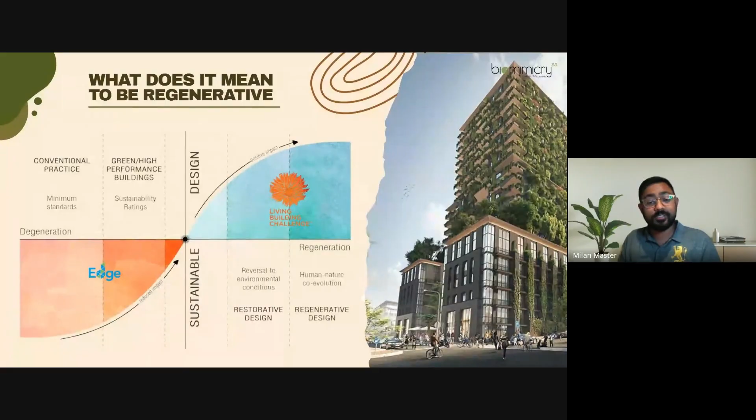But just this year, the company has been bought over and the designs are changing. And so I also want you to think, are we actually ready to move towards regeneration? Or, is the market ready? That is what they said when, unfortunately, this building is not going to come up anymore. But just think about that, are we truly ready for regeneration? Some would argue that we are, and that's where the Living Building Challenge comes into play. So what is the Living Building Challenge, and what does good really look like if we need to move away from less bad towards more good?

Well, the Living Building Challenge is a philosophy, an advocacy tool, a certification program that defines today's most advanced measure of sustainability and regeneration in the built environment. When Jason McLennan first developed the standard, he said, well, what if buildings behaved like a flower? What would that look like? What would this building in its ecosystem do with the water, waste, energy, and beauty of it all? The Living Building Challenge is done through the International Living Future Institute, and according to their website, living buildings are regenerative buildings that connect occupants to air, food, nature, light, and community.

They are self-sufficient and remain within the resources of their site. They create a positive impact on humans and natural systems that interact with them, similar to how a flower would. But what does that truly mean?

Well, the Living Building Challenge comprises 7 performance categories known as petals, which are divided into roughly 20 imperatives in combination. And these imperatives are applied to every type of building project, no matter the size or location. All imperatives must be met in order for the project to qualify as a living building. And what might these petals be?

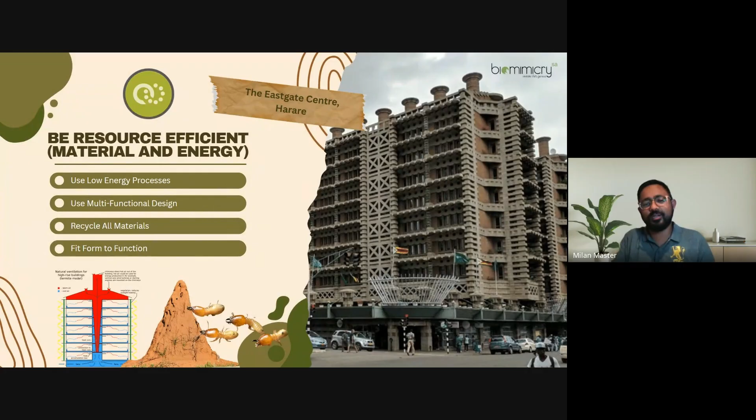We have the next principle, which is being resource efficient with materials and energy. How do we fit form to function? I think it's very easy to say, yes, we're going to fit form to function, but does that form actually produce the function that it needs to be? This is a very classic example in Zimbabwe.

It's the Eastgate Center. And Mick Pearce, when designing this, looked at termite mounds and realized that airflow through these mounds requires very minimal energy because the airflow, it fit the form to function. And so he used this and designed it here. And 30 years later, this building still has very minimal air conditioning requirements just because of the function of the building.

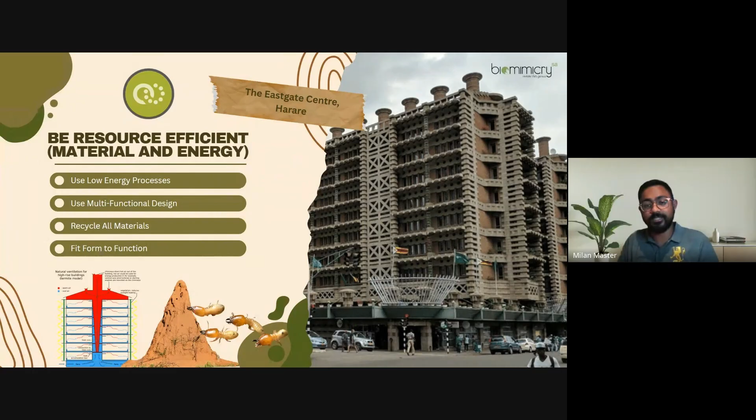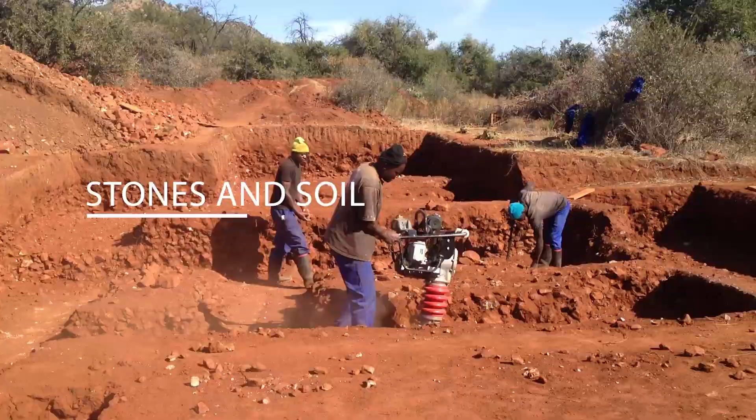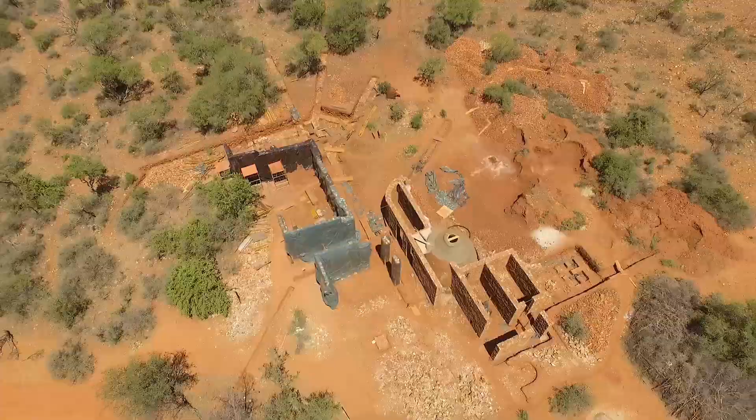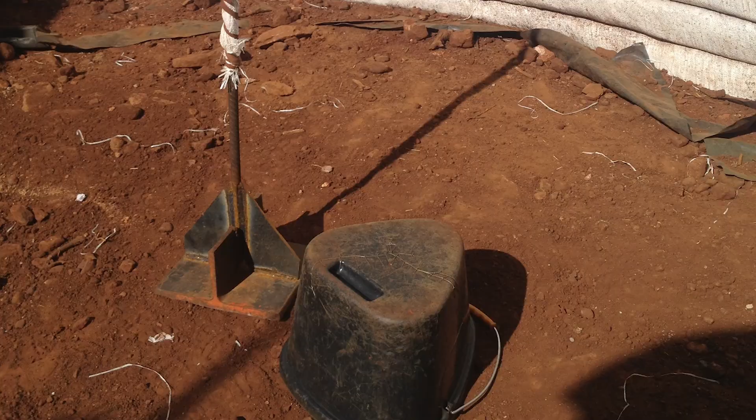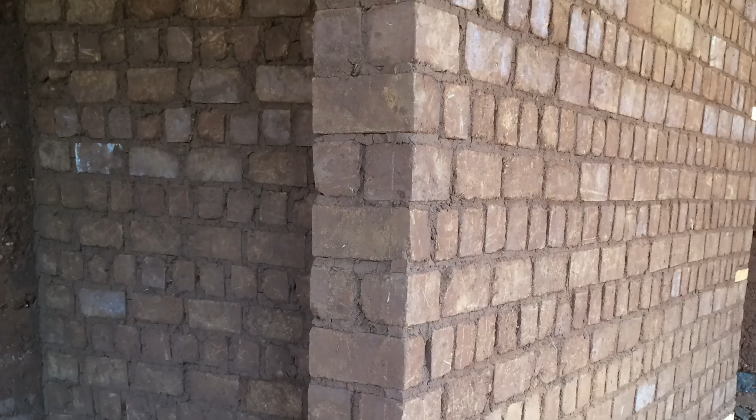Building with earth became obvious. It has been around for as long as mankind has been building. The soil that comes from the site requires no transport and no transformation. Thick earth walls take advantage of the large daily amplitude, regulating temperature in summer as much as in winter, avoiding air conditioning. By removing cement, our earth building will one day return to nature, a little like a sandcastle erased by the tide.

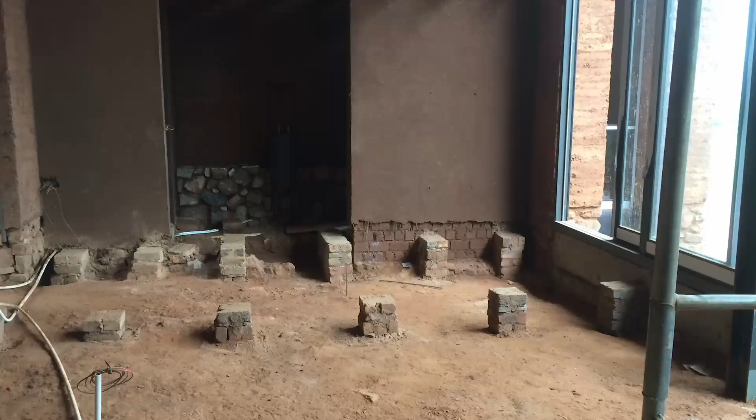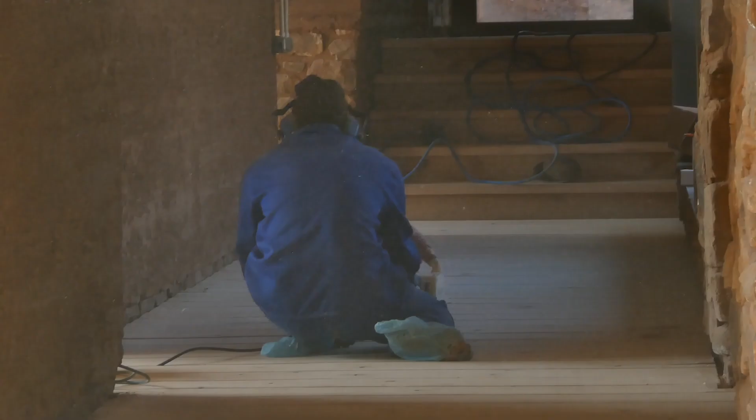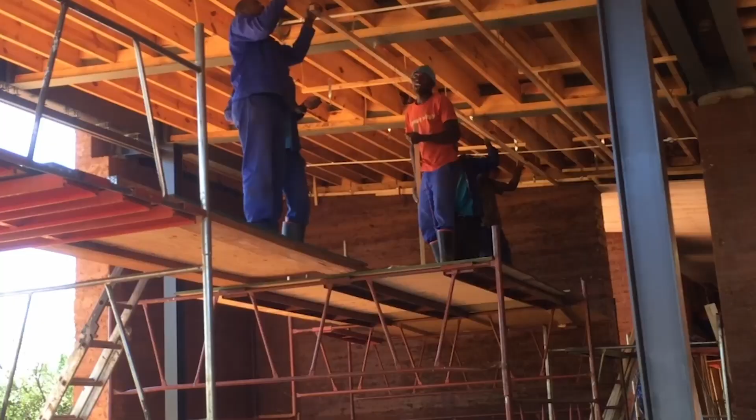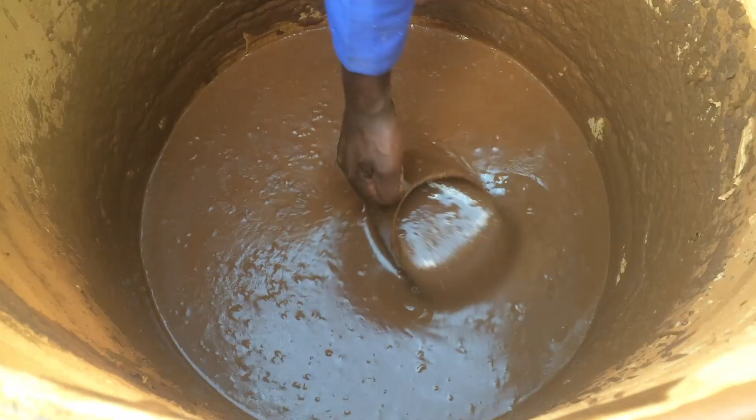Inspired by old ruins in the area and people across the world, our project became a lab for experimenting with different earth techniques, from stone and mud to rammed earth, compressed earth bricks, earth bags to straw and soil plaster. This, combined with waste granite, scaffolding planks and homemade paint to name a few, has made for a raw and rich living environment.

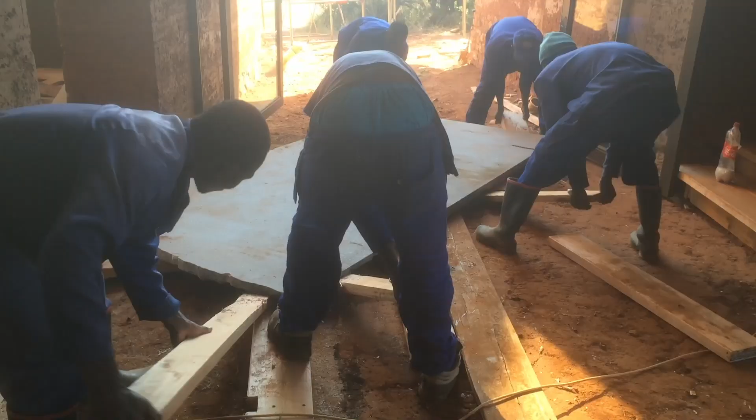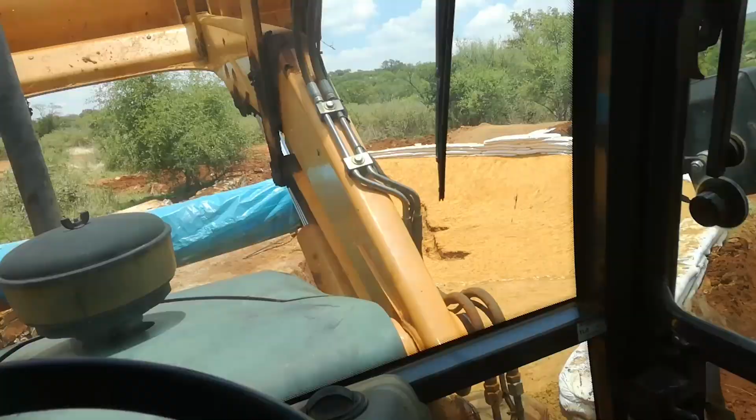Another achievement was, I believe, our decision to build the house ourselves only with the help of a few unskilled laborers, and in so doing, teaching them the building techniques we wanted to implement. This took a little longer, but had more benefits. We believe that through this project, we demonstrated that building differently is possible, closer to nature, closer to the people, enriching both. We hope this will inspire others to do the same.

Okay, so building with earth. So I'm going to try to be a little more practical. I mean, it's a very practical project that's born out of a passion. I'm more known for working in the corporate environment and large building environment, but I've always had a passion for buildings that really incorporate or work better with nature. And this opportunity presented itself, and we really dived directly into how to build with earth.

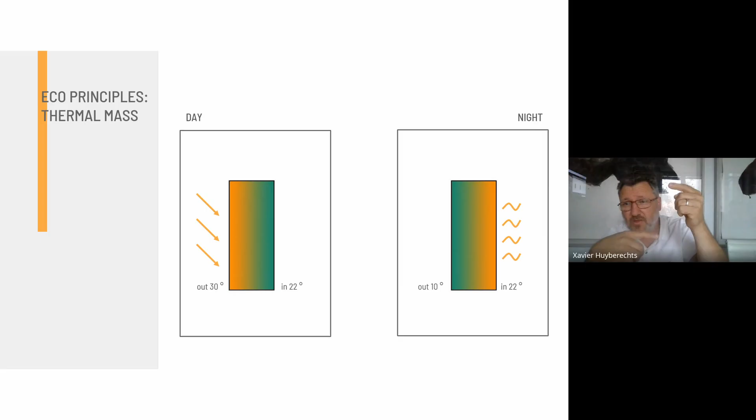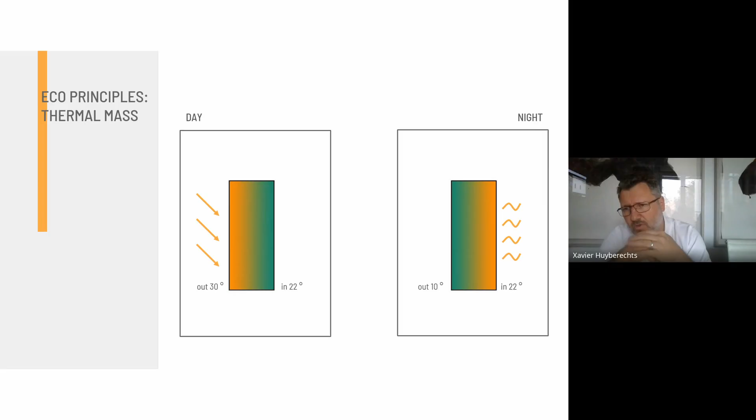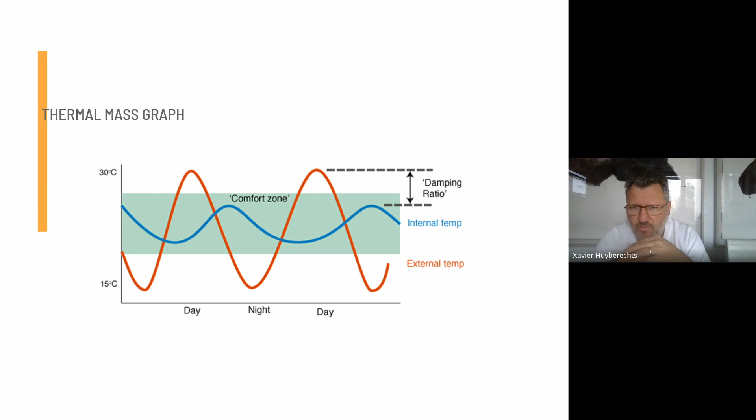On the south side, on the north side, I'll get there. I'm still in Europe today.

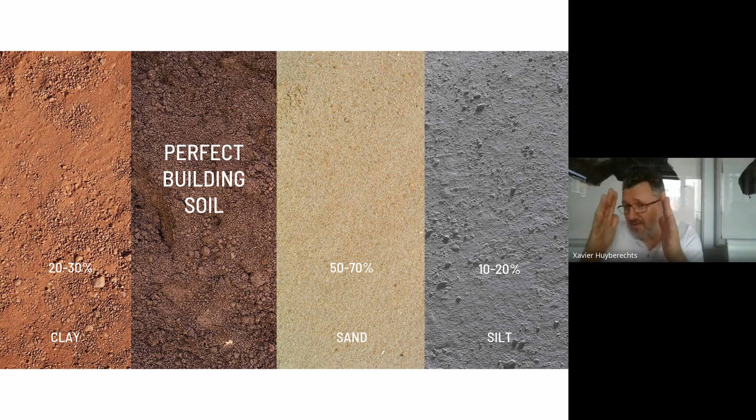So building with earth. The main thing that you need to know is that you need to have the right soil to be able to build with earth. If you've got pure sand, well, nothing holds and it just falls down all the time. We've all built sand castles along the beach and they don't stand. And even when you wet them a little bit to try to make them hold, once it dries, it goes flat. So pure sand is no good.

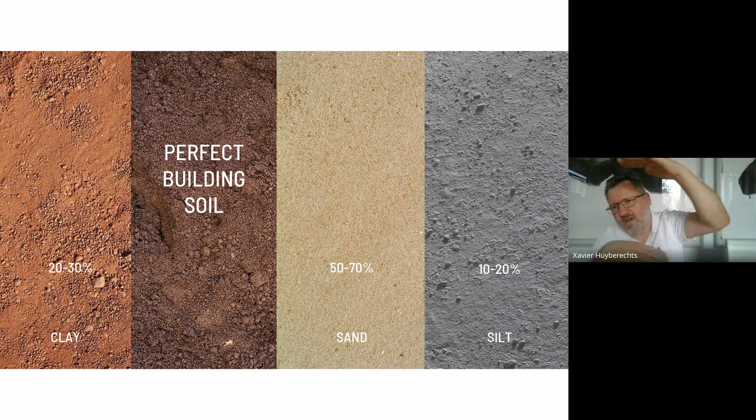Pure clay is no good either, because as architects or people in the building industry, you know that when you build on clay, when the clay gets wet, it swells, and when the clay dries, it drops and it starts cracking. So too much clay is also not good. And then there's the silt. The proportions you need to have an earth that you can build with is between 20 and 30% of clay, about 50 to 70% of sand and 10 to 20% of silt. That's really the perfect type of mix, and you can push that quite further.

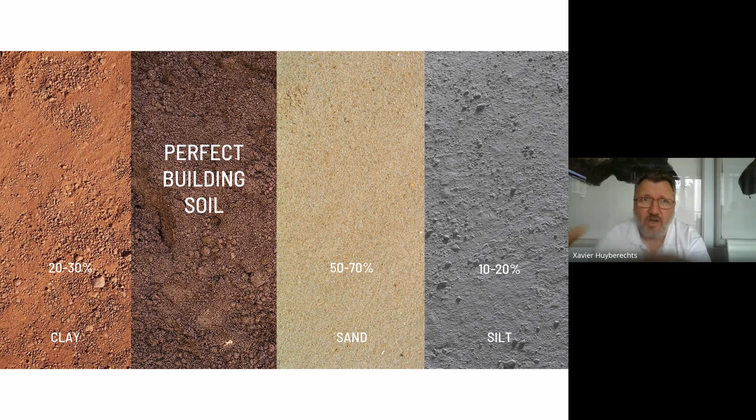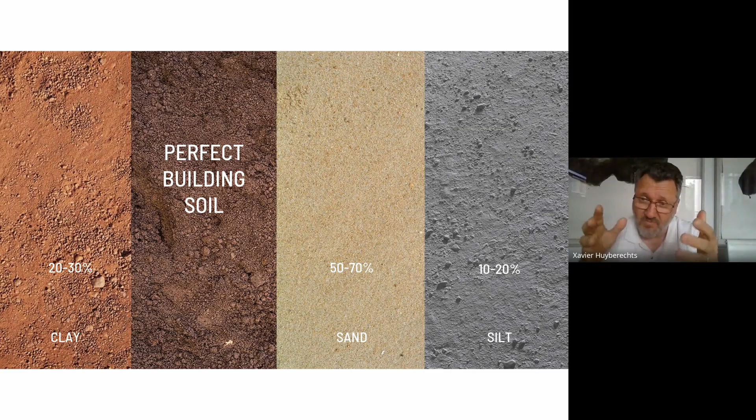Now, if you are close to a river or a riverbed, you need to pay attention that you don't have too much clay. If you are very much inland, far from everything, most probably you'll have a lot of sand. But testing is very easy. So there's about 9 hand tests that we use to test the quality of the earth. These are just 3 of them.

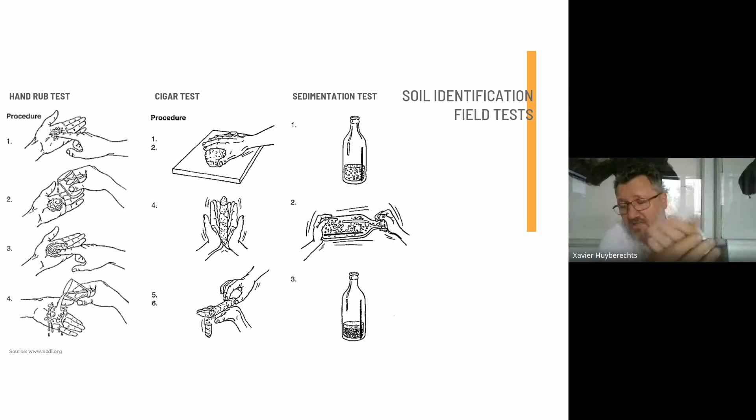The one is you put some soil into your hand and you just rub it a little bit in your hand. If you rub it and there's nothing in your hand, it means that it's pure sand. Like on the beach, there's nothing left. So that's no good. If it sticks and it's very orange and it sticks to your hand, there's too much clay. And so as you learn about building with earth, very quickly, just by grabbing a little bit of soil from the site, you will see whether your earth is correct, or whether you need to bring a little bit of sand or a little bit of clay.

Another test is the cigar test, where you moisten the earth slightly, and then you create a long cigar. You push it over your hand or over the edge of a table, and you see how long it goes. So if it goes too far and it starts bending like that without breaking, you've got too much clay. If you push it and it breaks immediately, you've got too much sand. So those are 2 quick techniques.

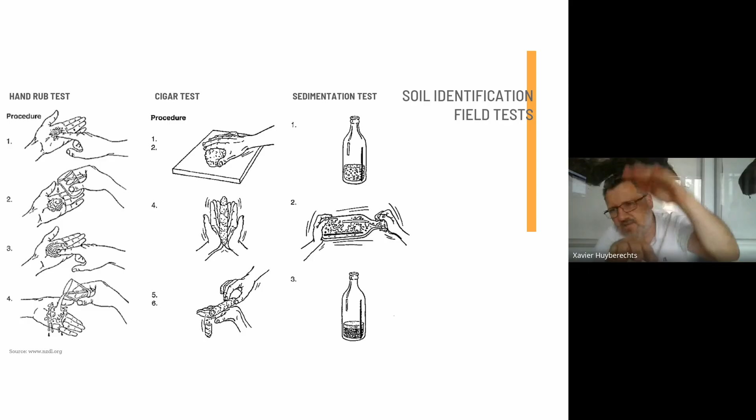And then one that is almost compulsory is really the sedimentation test, where you put earth into a bottle, 50% water, you shake it well, you leave it for 3 days, you come back and you will see that all the different elements have actually layered in your bottle, with the water at the top, and then the clay, and then the silt, and then the sand at the bottom, and little rocks and things like that. And then you can really start seeing the proportions that you have. So those are hand field tests. Some people also use lab tests to be more precise.

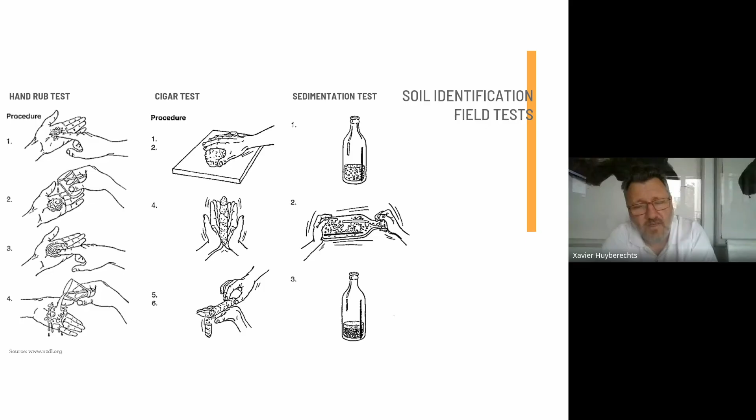And if I've got time, I'll speak a little about some of the masters in building with earth. So into the house, what we wanted to do is to really create about 4 building techniques. And of the building techniques with earth, the first one that everybody generally knows is the rammed earth walls. So if you go to the next slide, with rammed earth you use some type of shutter. You can use wood shutters like in the past, and you will see that we used wood shutters in the first house that we did, and there was a lot of movement with the wood.

So after that, we worked with steel shutters that we borrowed from one of our contracting friends, and that works even better. So you put your shutters up, you put your soil, you moisten the soil a little bit the day before, but it's just moist. It's not wet, it's not cement, it's not flowing, because you need to be able to compact it.

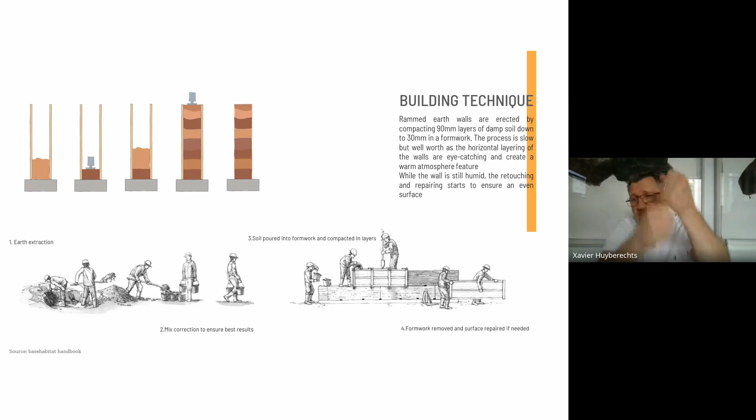And you create 90 millimeters of soil and you compact it down to 30. So you compact 2/3 down to get to the right level. You can compact by hand, and that's what we do with stampers. So we've got a big heavy plate at the bottom and then just a rod at the top, and we stamp the soil layer by layer by layer, and you go up that way.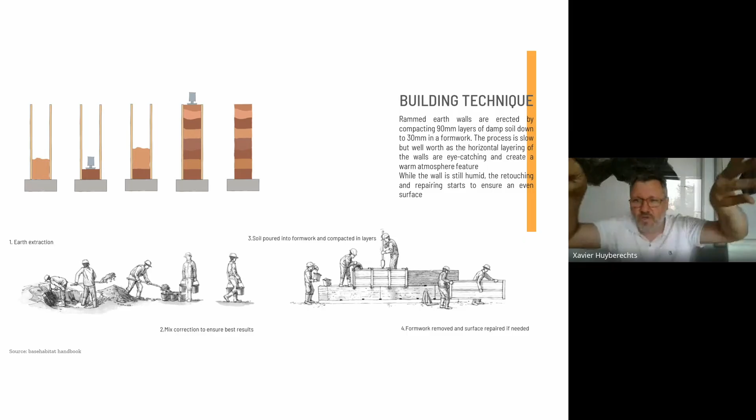In Europe, they use a lot of mechanical stampers, so like a big drilling machine that stamps, but you can't use the machine that you do the roads with. That has got too much force and it pushes all the earth away. So you can't press too hard. There is something that you need to compress the earth, but you can't go beyond, and then it starts breaking and going all over the show.

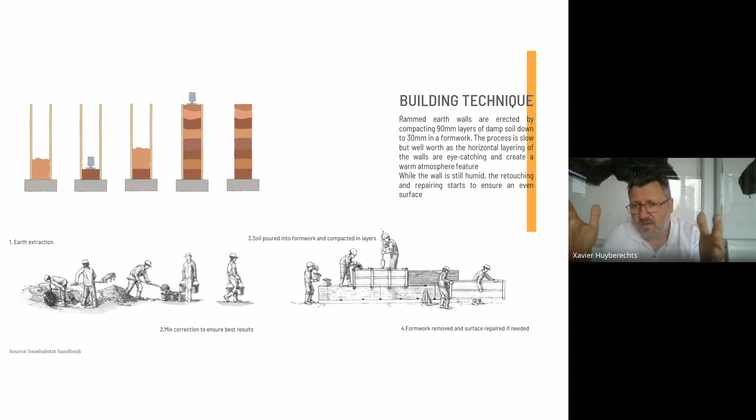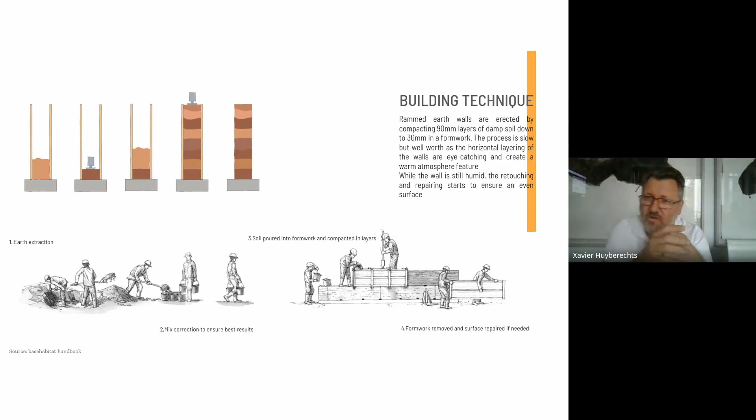So those walls are extremely strong. One of the walls in the lodge has got about 6 tons per running meter on the wall, and it's a 5 meter tall wall. It's 50 centimeters thick, and just to give you an idea, 6 tons is about 3 or 4 large SUVs per running meter of the wall. And that's because we've got a green roof. And in South Africa, our green roofs need to have a lot of soil, because otherwise nothing grows on it because it's too hot.

So here you see the walls, how we will build them with formwork. Now it's very different from concrete, where you need formwork right to the bottom. Here you can see that the formwork climbs as you do your layers. You need your verticals, but horizontally you only need one panel, and you push that panel up all the time. We have got some ferrules like in concrete, so that when you stamp it, the shutters don't split, and so you do see ferrule holes in a rammed earth wall.

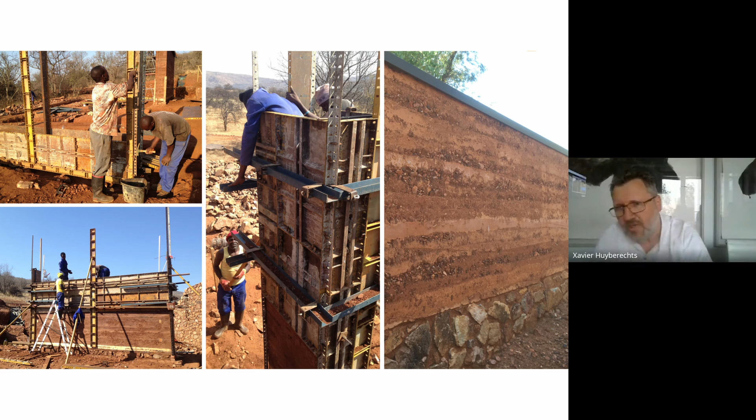The next technique that we've used is the compressed soil brick. So this is a brick that is compressed. It's not a brick like you see a lot in Africa, where they just put it, tap a little bit with their hand and then let it dry. It's also a good technique, but this is quite a strong brick. So it's just earth, and we compress it with a hand machine that you see on the next slide. We found plans on the internet, made a cutting sheet, sent it to the steel guys. They got us the pieces, we assembled it, and we used the machine.

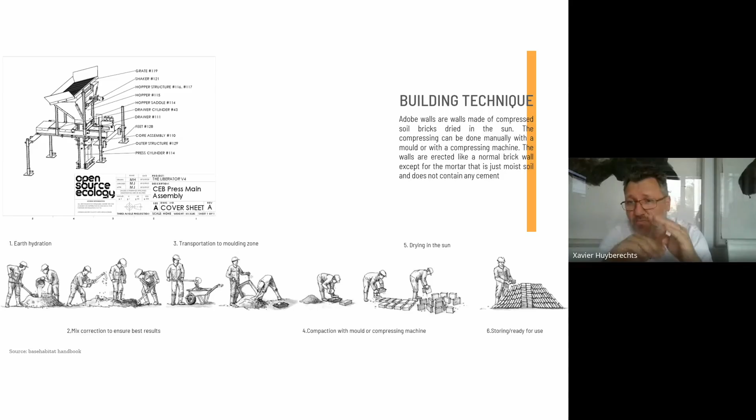2 people can make more or less 500 bricks a day. So that gives you a little bit of how many bricks a day you can create. And then you build it like a brick wall, but no cement. You don't use cement in between the bricks. You just put mud in between the bricks. So here you see our machine on the left. You see our bricks, so you need to compact them, and then you let them dry for 2-3 days, and then you put them up.

What you can also see on the picture is that we had timber cleats in place, so that we could fix our doors and other elements of the house. Because these bricks are, you can't really drill something into them; if it's just to hang a frame, it's fine. But a door that you bang every day, it's not gonna withstand it. And that's why we have those cleats to hold our doors.

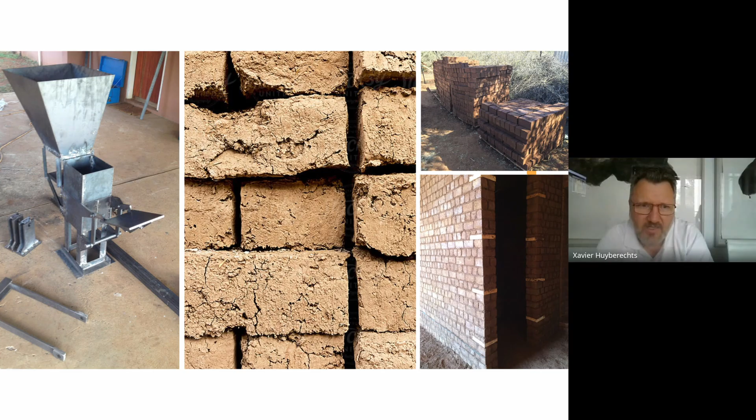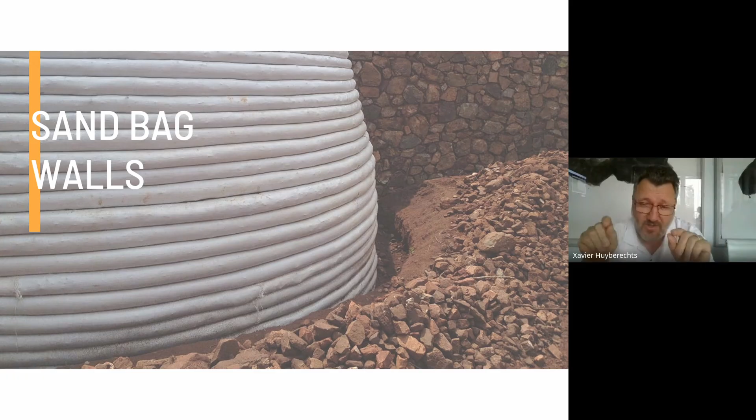The third technique that we used is the sandbag or earth bag technique, which is quite an interesting technique because it was developed by NASA to go and build on the moon, because the only thing that you need is the bags. And depending on the quality of your earth, on the moon it's pure sand, so they needed quite strong bags. But here we have an agricultural bag that is actually biodegradable. And before we finished the building, most of the bags were eaten by the sun, because they really serve as temporary formwork.

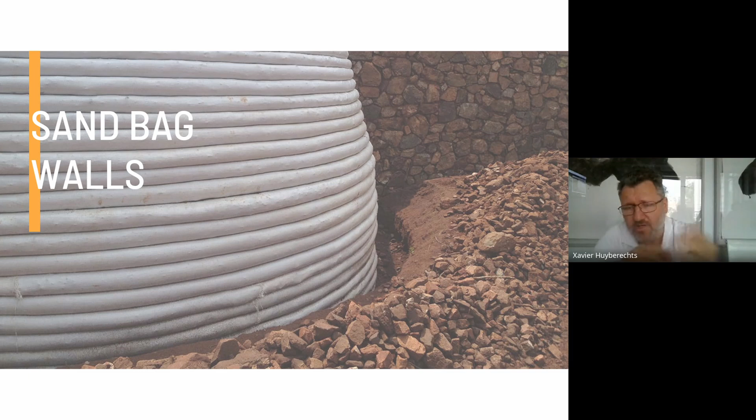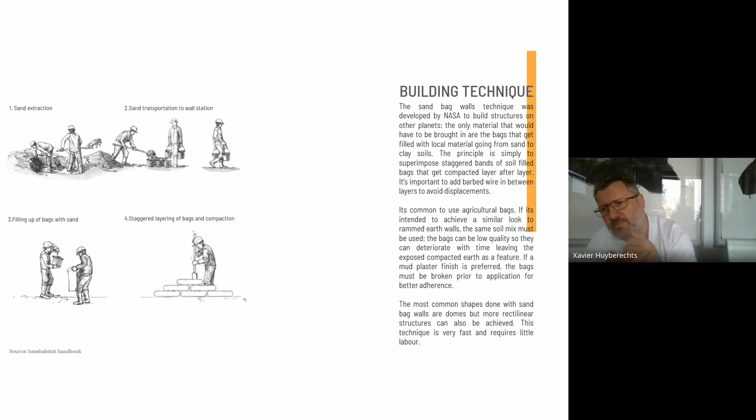And if you go to the next slide, so there you bring the earth, and then you put it in the bags and you compact each bag. If you go to the next slide. So here you see how we are doing.

This is a part of the house that is the dome, and that is a dome that is below 5 meters of soil. So there's quite a lot of pressure on that dome, but its circular nature makes it very strong.

You can see that we've devised a bucket. You take the bottom away, and you take the fabric of your sausage, and then you put the earth in and you compact as you go. You see the stampers that we use in the middle picture, and then on the right it's a test that we did where we burnt the edge of the bag and we cut it off, and it gives you a sort of a rammed earth, but also with the horizontal lines of the bags that are left.

But if you go and see that wall now, you don't see any of the bags anymore because it's being eaten by the sun. So that's the dome finished, which is a beautiful space, completely below the earth, so very fresh, and it's really a good family environment where the kids play board games and things like that, or where I do my siesta in the summer.

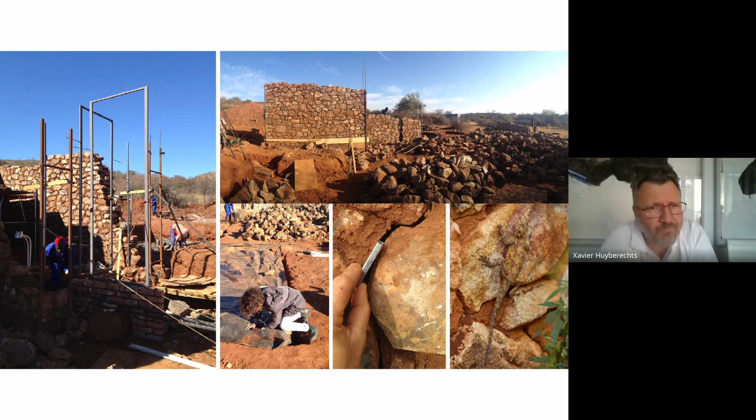Then a lot of the walls, so the rammed earth and the rock walls, can stay as they are, but the compacted earth brick and the sandbags, we finish with a mud and straw plaster, which is really what it says. It's mud and straw, and if you can cut the straw into smaller bits, it's even better. That's why you can also use cow dung, because cow dung is micro-chipped grass. And so cow dung is extremely good to make plaster, but you need a lot of cows to create enough dung to plaster the inside of a house.

And then to finish it all up, we paint the plaster wall with the natural Swedish paint. It's called Swedish paint because it was used by the Swedes a very long time ago. And in Sweden, you see the houses are red, blue, orange, and all different colors. And I can tell you it was like that before Dulux and Plascon existed.

And it's just flour that you bake, water that you boil. You put flour in it, and a little bit of linseed oil if you want it more plasticized. And then any colorant that you want. Here we use the earth of the place to give us that brown earth. You boil it for about 30 minutes, and then there you've got your paint.

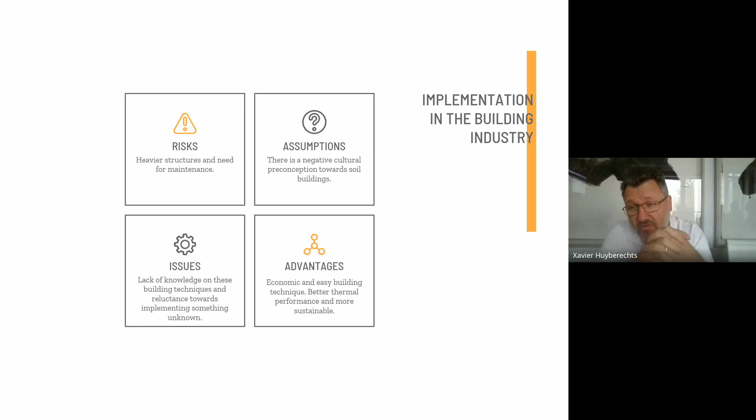The principle of building with earth is always to have strong wellies, to protect the bottom of the wall, and a large hat to protect the top of the wall. Now, because we wanted a minimalistic look, we don't have the wide hat. We've got very little drips and things like that, which also works, but you have to be more careful when you do that. So the principle is good wellies and a good hat. If you leave an earth wall exposed at the top, I can promise you it's gonna disintegrate. Whatever you do, it can be as well rammed as you want. It will disintegrate quickly.

As I said, there is a very negative cultural preconception about earth. Because it comes from a vernacular and from the village, people think that it cannot be brought into the cities or the larger scale buildings. So it's building techniques also that have been lost. So when we did this project, we decided not to use a conventional contractor because he would come with all his preconceived way of building, and we did it ourselves with farm laborers that we taught all the techniques, and therefore they were building the way we wanted them to build, and not like a normal mason or a normal contractor would work.

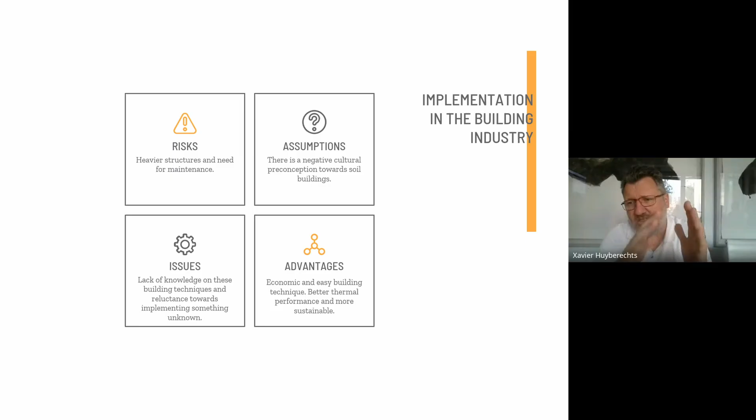And obviously, economically, people always ask, is it cheaper? I don't think building with earth is cheaper, but there is a massive shift between the cost of the material that you buy, the baked bricks, the cement and things like that, and that money is shifted towards the labor. Now in South Africa, where we've got such a big population that needs work, I don't see why it's not used more, because all that money that in traditional construction you use to buy materials really shifts towards the labor.

And there's a study done by somebody that builds with earth in, I think, Iran, if I'm not wrong, that did a clear exercise on that and clearly showed that shift of the budget from the one to the other. It's also slightly slower to build, but it's also something that you can build with the family and with people that don't have huge building knowledge. So it can become a family project, for instance, or like in the rural environment, the houses were built by the community, not by one person. They were building one house after the other together, and doing the maintenance one house after the other together. So there's quite a social effect to building with earth. So I need to wrap up.

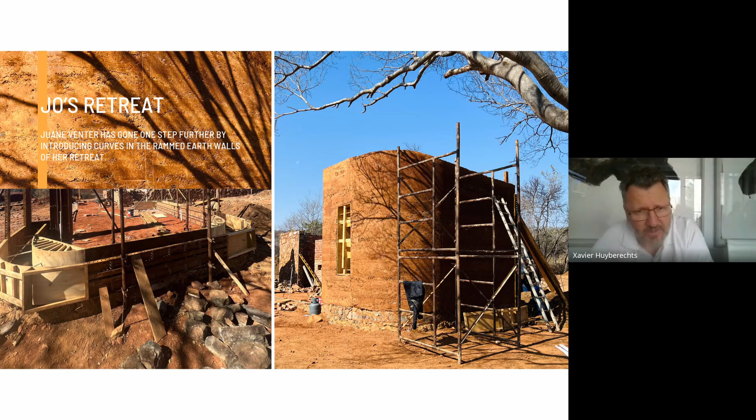And that's it. That's a little bit about our adventure. I could speak hours about this. Yeah, and if there's any questions, please go ahead.

Thank you. That's awesome. Any questions from the audience? Just put up your hands.

I don't know what your name is, but Specialist Writing Services? Yeah. Okay, you can hear me. Okay, sorry, yeah, it's Gareth here, Gareth Griffiths. That's one of my email addresses there.

So you've got the silt, then you've got the clay that's got a slightly higher granulometry, then you've got the sand, and then you've got the stones, and you can have all of it. So the one thing that I wanted to speak to, the master of building with earth is an Austrian guy called Martin Rauch in Austria. And he works very scientifically, and he's got 9 granulometries in some of his buildings, but he builds 2-3-story buildings with walls that are 30 cavity 30 type of thing. So he goes to the extreme.